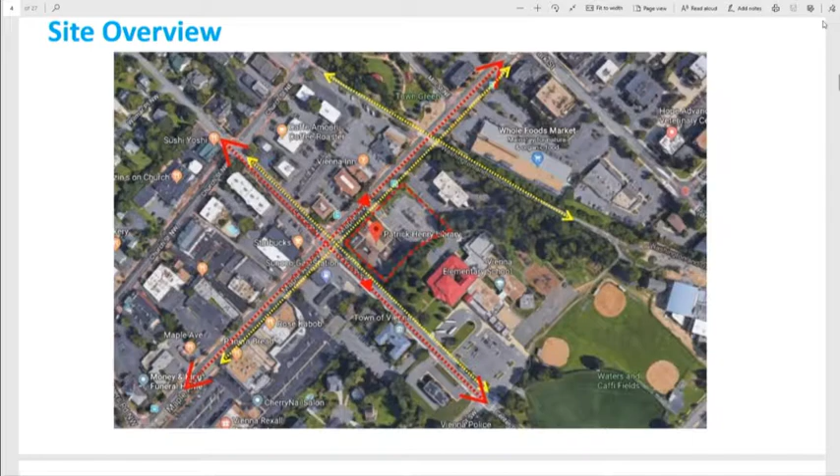So when we were evaluating the site, one of the things that we wanted to make sure that we maintained both of the access points along Maple Avenue as well as Center Street. That was very important to the design team, especially since we were going to try to have this parking structure that will need to have access for the vehicular as well as the pedestrian access for the library.

When also we were considering the site, we also looked at the existing facilities. The existing utilities were already in place. We also looked at the site amenities, like there was a bus shelter that was already there that we did not want to alter, as well as an existing access to the school. That was very important. As you'll see in the top corner there is an access to the school service area that we needed to maintain while we were developing the site as well. So these are some of the important things that we had to take into consideration.

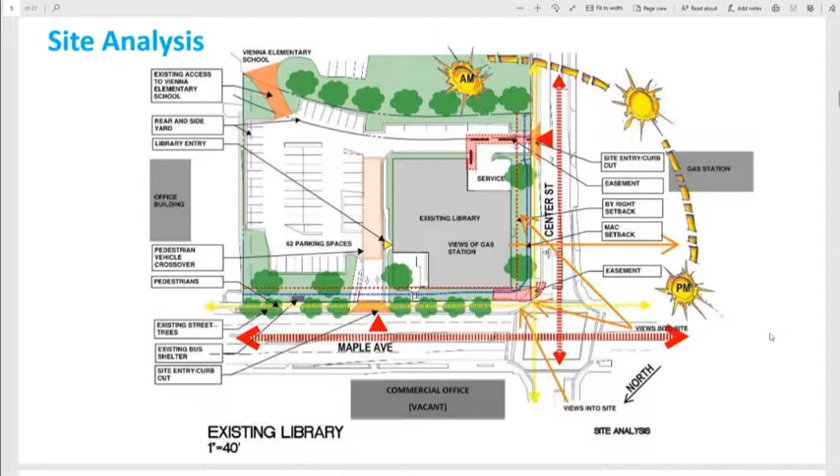As you guys know, the existing character is more of an older architecture. As you'll see as we move forward into the design concepts, you'll see that the design team took two artistic looks. We took at one a modern look and one for a more traditional look that would fit into the existing streetscape. Those are just concepts that were designed so that we could get just some ideas of materials and things that we could potentially use moving forward.

Just to mention again, this is a feasibility study, and it will be further developed as the design process goes forward. So the original scope, we were looking at basically the by-right C2 zoning, as well as looking at the Maple Avenue commercial zoning district as well.

As we were defining those concepts, we found that the Maple Avenue commercial zoning did not help the proposed development. It actually required more open space and less impervious area. When developing the parking garage and developing the site for maximum use, we weren't able to develop as much area for the parking as well as the library. So that option was not further developed.

The first option, I'll go quickly through it because it's just the county only, but it's a two-story library facility. While developing this, we were able to fit 90 parking spaces on the site. I do want to mention that the county did do a parking study by Walker Consultants, and that study showed we needed approximately 115 spaces for the 21,000 square foot building. Per zoning, it was 72 required, so we were meeting the zoning requirements and going a little above, but not meeting the demand needed for the actual library.

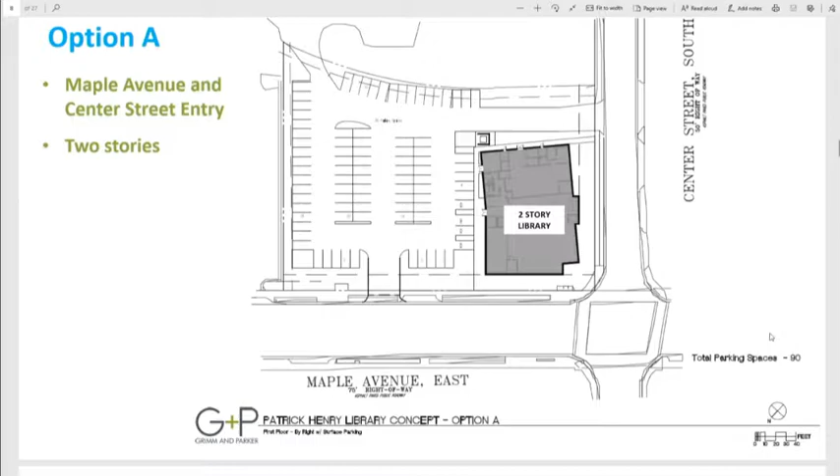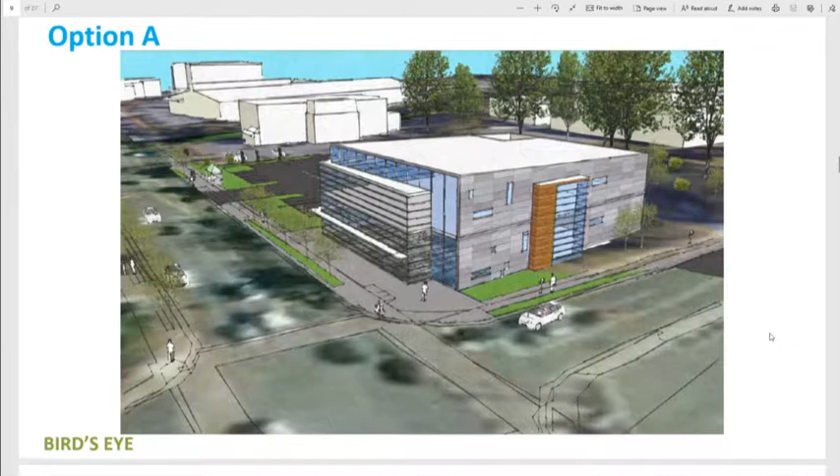The concept for A is more of a modern feel, like I had mentioned—more metal panels and a lot of glass facade. That's just something the architects took into consideration to try to change up the look. These could get further defined and the materials could change as the design progresses, but this is just for the library itself. Some other views from Maple Avenue.

Option B1 is a one-level library, which is the best scenario for the library—they prefer that all programming be on one level. The parking garage would then be two levels on top of the library. With this concept, the total amount of parking is 209 spaces, of which 125 would be for the county's purposes, and 84 would be the town of Vienna's.

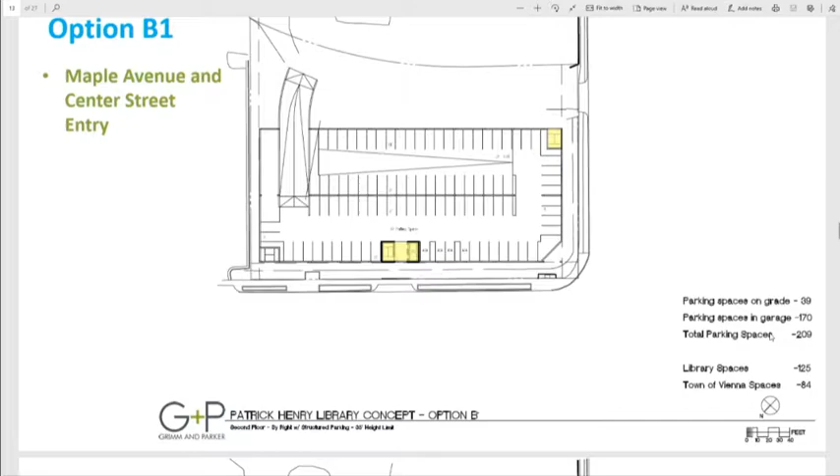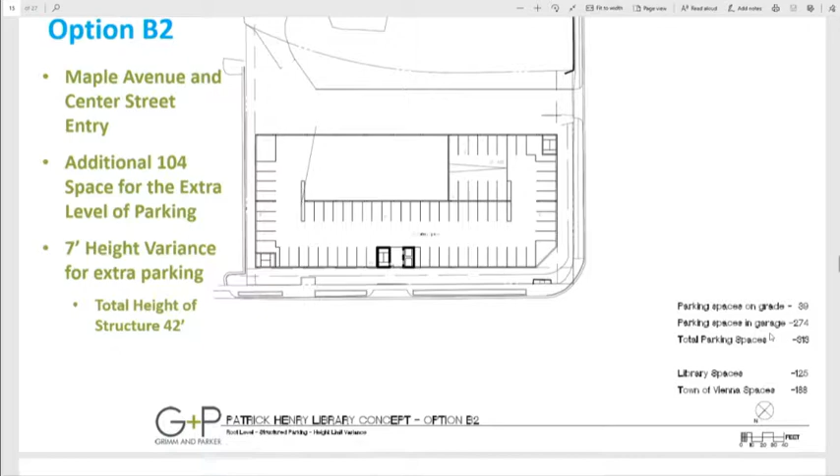Option B2 was just an additional layer of parking. The county would still have the 125 spaces, and the additional parking would go to the town of Vienna, which would then have, I believe, 188 spaces for this option. With B2, like I mentioned, there's a variance we would need to apply for—it's approximately 7 feet above the maximum height for the by-right zoning.

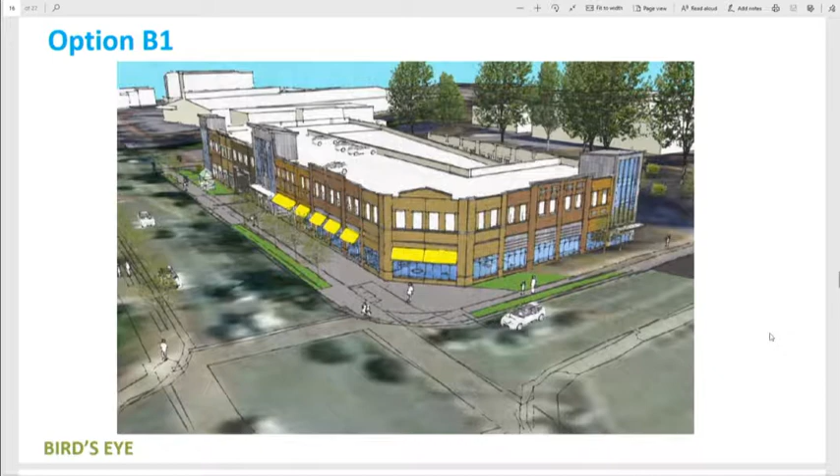These are some of the schematic sketches for the B1 option. This is a storefront type feel, streetscape with awnings and walkable sidewalks. You can't really tell it's a parking garage because it looks like a store—it has fake storefronts. The bottom level, where you see the yellow awnings, would be the library. So this gives it more of a town feel.

Option B2 just elevates it one level, so you'll see the height difference—now there's a second row of windows. One thing I want to mention about the site: the school behind the library is actually at a higher elevation than the library. So the additional height won't create a noticeable scale difference, since the school is so much higher, as well as the buildings to the east, and the gas station to the west, which may potentially be redeveloped in the near future.

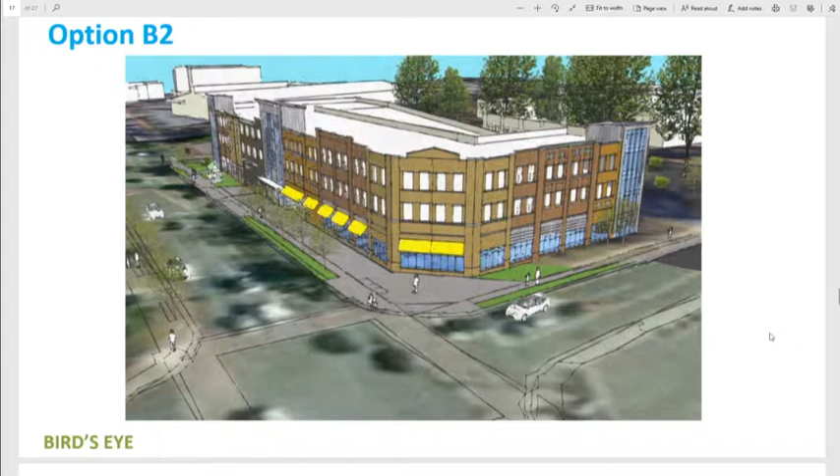So these are some additional schematics from Maple Avenue—the B1 option, and then the B2, showing just the additional height.

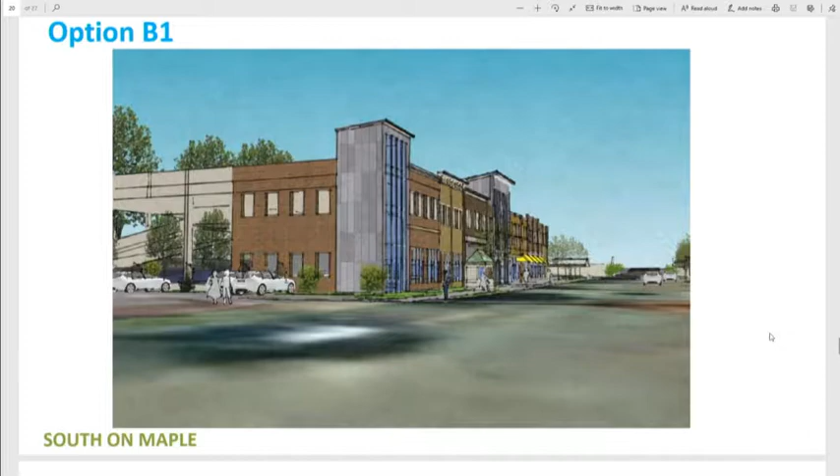Here you'll see that they did intermix some of the materials, the metal panels on the access ways where the elevators and emergency stairways and egress points would be. Just another view where the drop-off area or loading area for the library is, and the drive into the garage.

So as I mentioned, option A is just the county only. Option B is the partnership option. And then option B would be B1 or B2, depending on what the town would want to pursue on the number of parking that they would want to achieve.

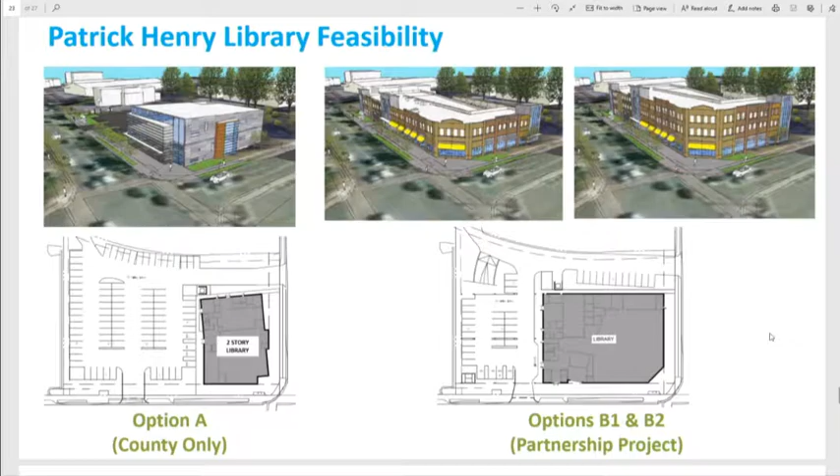Option A, just to recap, would be 90 spaces for the county only. Option B1 would be 125 for the county and 84 for the town. Option B2 partnership would be 125 for the county and 188 spaces for the town.

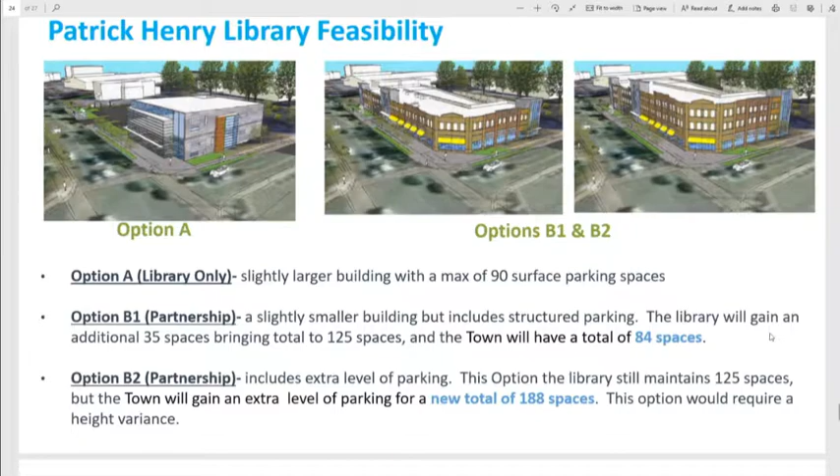So as we're moving forward today, we're at the council meeting, and we have already had meetings with the county executive and the upper management team, and they are in support of moving forward with solidifying a partnership. So actually, as soon as tomorrow, we're going to have another work session with the team, with the town and with the county together to kick off the partnership.

So just to let you know the timeline on this, we are having the work session tomorrow, and we'll be continuing to further develop the agreement through the end of the year. And then we will get the agreement approved and then solidify the scope and budget for the bond referendum for November of 2020.

And then pending the approval of the bond in November, potentially we would start the kickoff of the design January of 2021. So with a completion by the end of 2024 for this project, this is all an estimate at this point, but this is what we would potentially be tracking against.

So moving forward, like I mentioned, we have the support of county management, and we're going to solidify moving forward with the partnership with the town. We just need to define some of the things and work out the details with the town, but we are looking forward to working together on this.